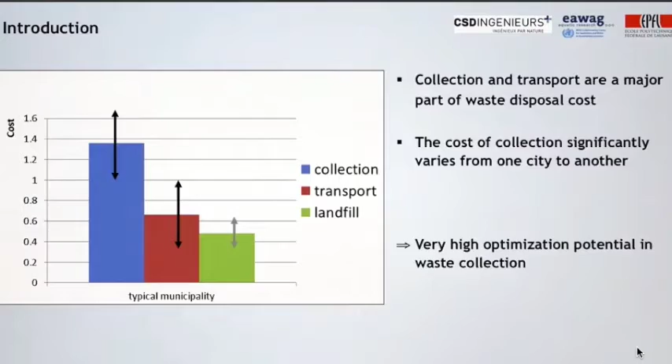Frequencies, collection routes, equipment, bags or containers, and trucks have a big influence on the cost. What is the main problem of waste management? Money. We don't have enough money to do waste management as well as we think we should.

Thus, we have two solutions: either we bring the cost down, or we adapt revenues and taxes to reach a sufficient level. Generally, we have to do both. Today, we will see how to bring the cost down and improve the service to the population.

What are the most expensive elements in waste collection? First, there are trucks. The trucks are very expensive, and also the workers. The workers are also a big part of the cost. Thus, if we want to reduce the cost, we have to develop solutions to use these important elements better.

We have to work on time reduction in order to load as much waste as possible in a reduced time. For that, we have to work on the organization and on the equipment.

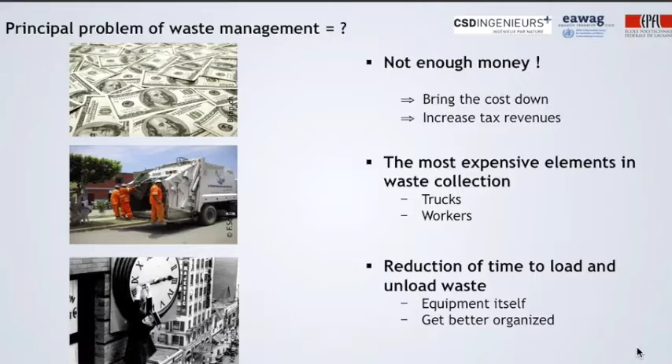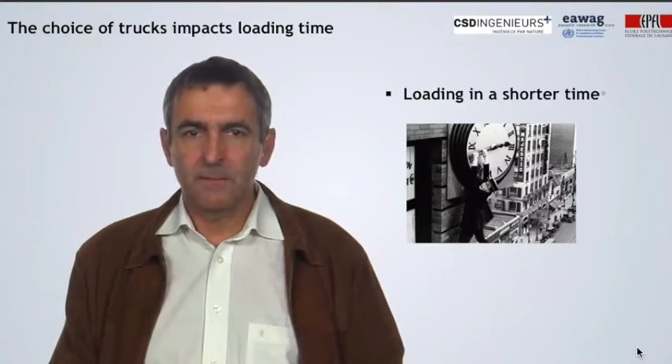We need to choose good trucks in order to minimize as much as possible the time needed to load, transport, and then unload the waste. For that, we have to choose trucks allowing us to load the waste in the shortest time possible. An important point is to have a compaction system which allows us to take more waste.

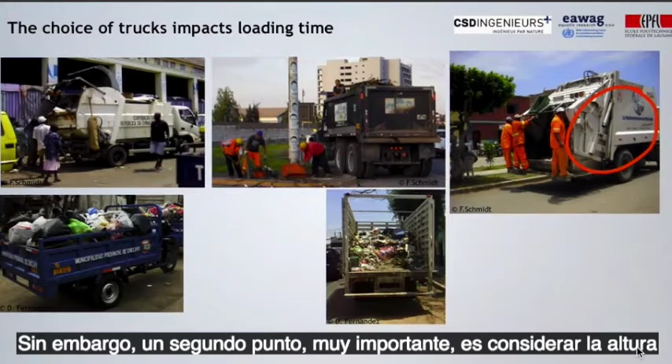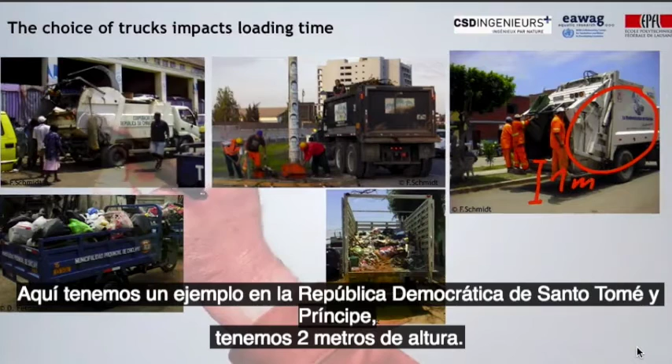But a second, very important point is to consider the height of loading the waste. Here we have some at 1 meter height. Here in this example in Sao Tome, we have 2 meters height. It's much more work, much more time.

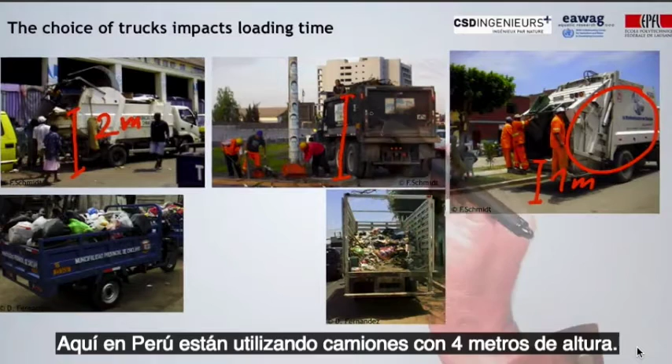Here in Peru, we are using trucks with 4 meters height. This needs much more work, much more time, and a lot of people for doing the same job.

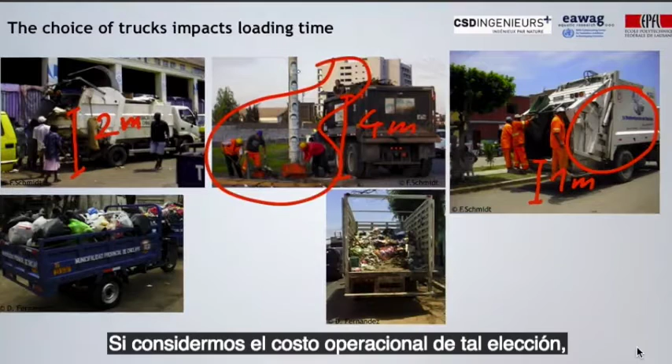If we consider the cost of operation of such choices, here in Peru we have an estimation of some 60 soles per ton. With this kind of truck, we are at about 350 soles per ton. This is 5 times more.

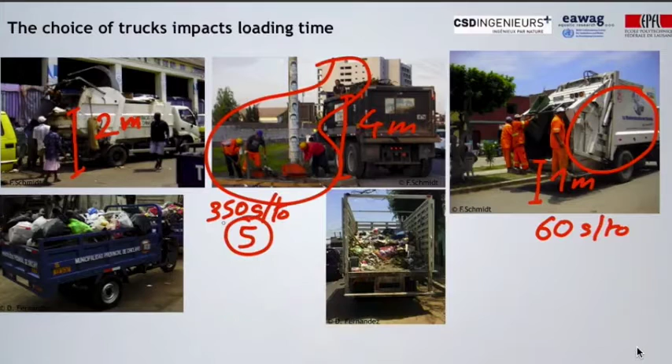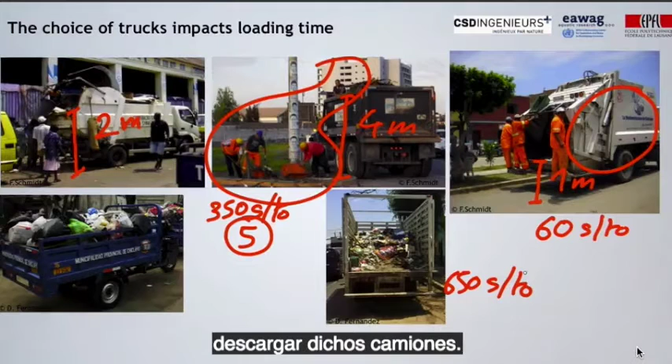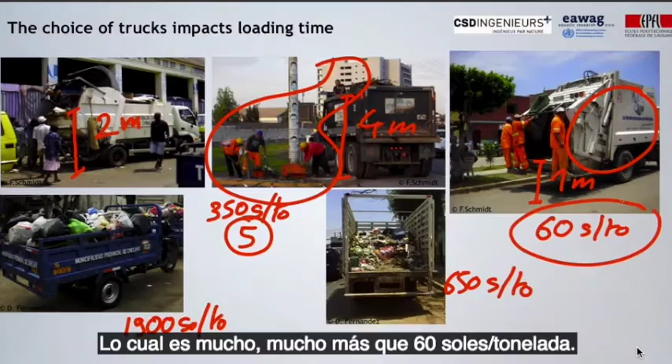And if we consider this kind of open truck, we are at about 650 soles per ton, because it needs a lot of time to load and unload such trucks. And if we consider these little vehicles here, which could be very useful to go in our streets, the cost is around 1900 soles per ton. It is much, much higher than our 60 soles per ton. So the choice of good trucks is very important in order to reduce the cost of collection and transport.

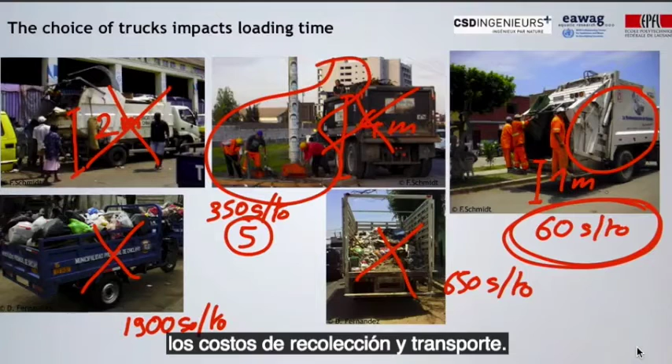The volume of the trucks is also a very important point of efficiency. If we consider such trucks, we have approximately 0.8 tons per cubic meter, because we have a compaction system. We have more or less 7 cubic meters, which makes more or less 5.6 tons.

In such open trucks, we have only 0.3 tons per cubic meter. Also about 8 cubic meters, we have only 2.4 tons. This is just half. In this bike system, we have also 0.3 tons per cubic meter and 1 cubic meter, which means only 0.3 or 0.5 tons.

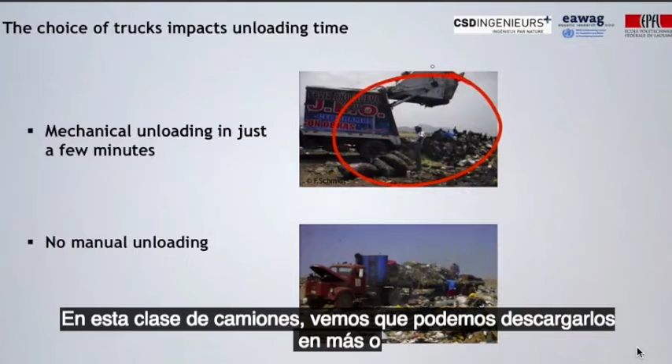So the transportation efficiency between these different types of trucks is very different, and we have to choose a good volume for efficient transportation. This has an influence on time and fuel consumption. Another element, very simple, is to choose trucks having an unloading time as short as possible. With this kind of truck, we can unload it in more or less 2 minutes with one driver.

If you have to do it manually, like in this situation, we need 3 or 4 hours with 3 or 4 workers. These are not good solutions.

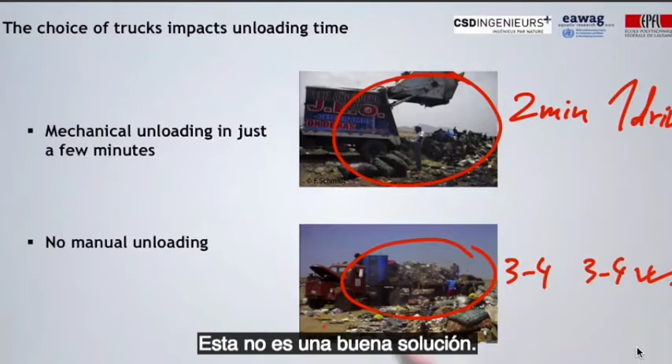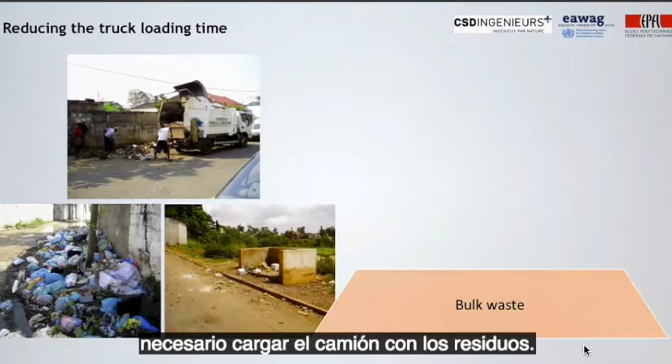For reducing the time the trucks are stopped for loading the waste, we also need to choose a good container strategy. Bulk waste on the ground is the worst case. Here, in Albania or in Sao Tome, we see how many times it's necessary to load the waste to the truck. The utilization of plastic bags allows a faster loading time.

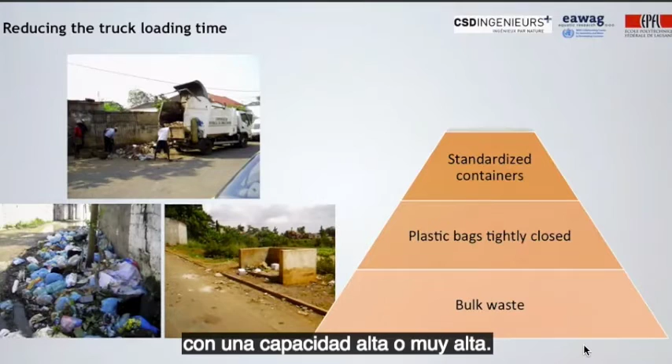The best is the utilization of containers and, if possible, standardized containers. The ideal solution for reducing the loading time is to provide containers with large or very large capacity. A truck takes more or less the same time to load 100 liters or 3 cubic meters.

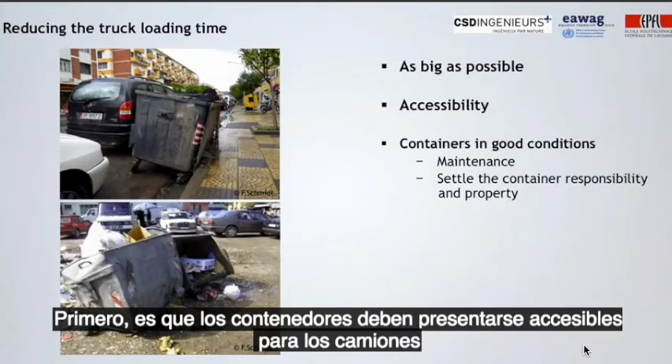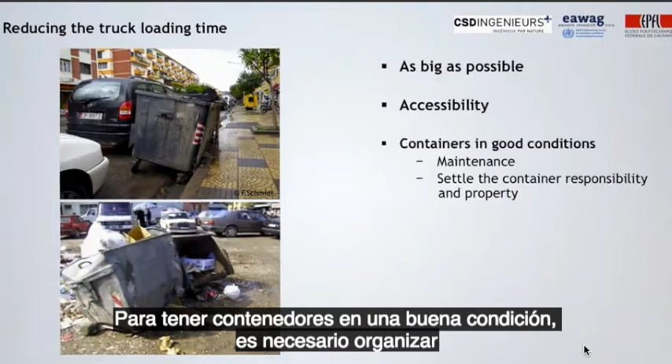There are some other conditions to reduce the loading time. First is that the containers must be accessible for the trucks and not blocked, like here in Albania, by the cars. For having the containers in good condition, it needs to organize maintenance and repair of the containers.

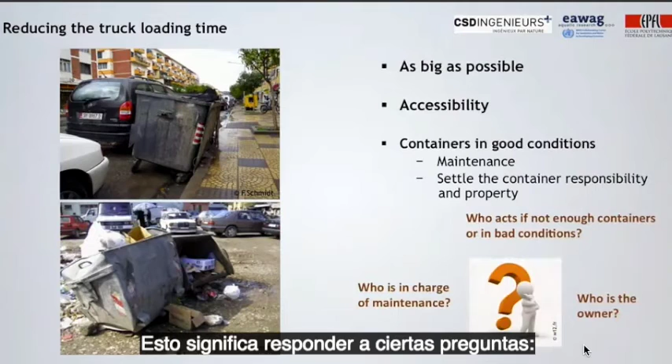This means to respond to some questions. Who is the owner of the container? Who is responsible? Who is in charge of the maintenance? Who will react if there are not enough containers or if the containers are not in good condition?

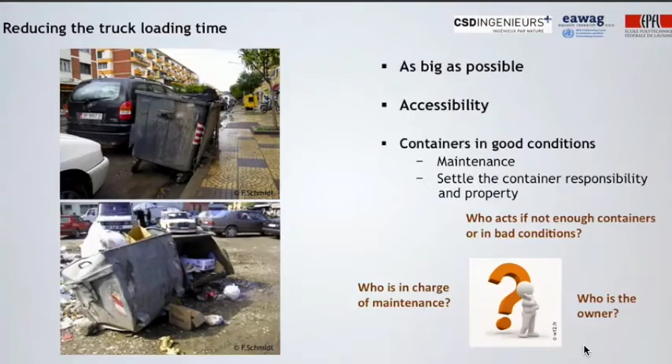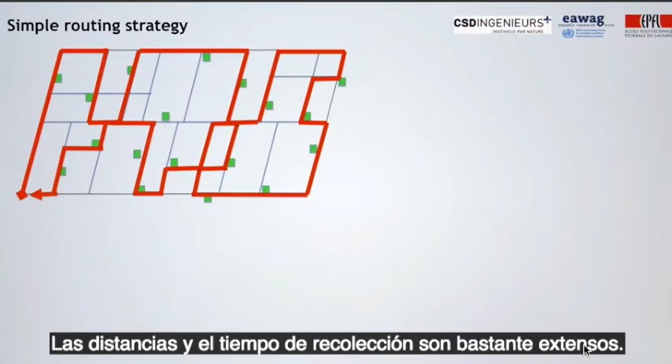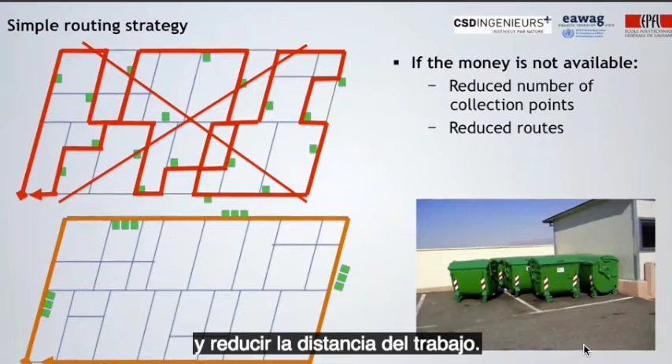A good routing design is another important point for an efficient collection of the waste. In this example, we see the door-to-door collection of every container. The collection time and distances are quite high. It could also be possible to reduce the number of loading points and to reduce the distance of the work. It will take less time, less effort for the same number of containers.

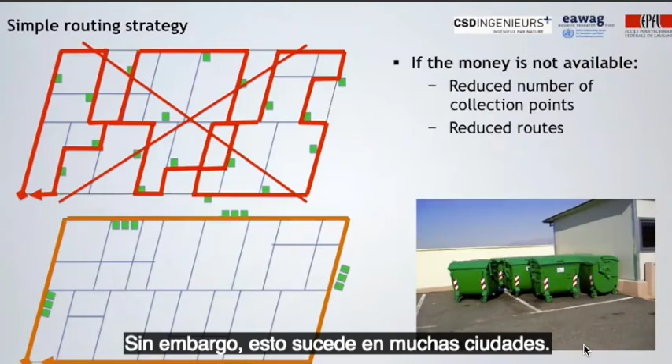It will require that the population has to go 100 or 200 meters to the container, but this happens in a lot of cities. Finally, transport is an important part of the cost, as we saw at the beginning. Transport costs depend on local conditions, quantities, distances and material. If you use a big truck or a small one, the time and fuel consumption are more or less the same. So it's very important to use trucks as big as possible.

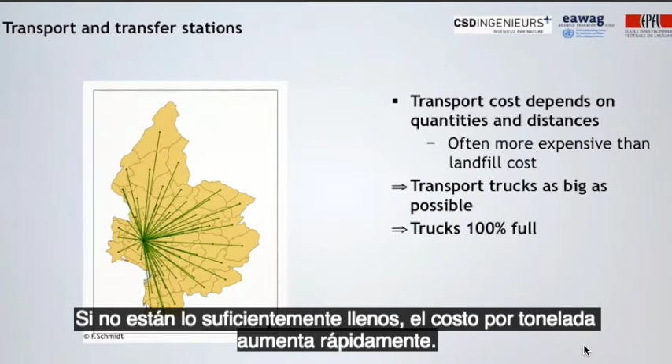To reduce the cost, it is also important that the trucks are on average near 100% full. If they are not full enough, the cost per ton will increase rapidly. But in general, collection trucks are not optimal for transport. If the distance to the landfill is more than some 20 kilometers, and if the volume is big enough, it is interesting to study the possibility of implementing a transfer station.

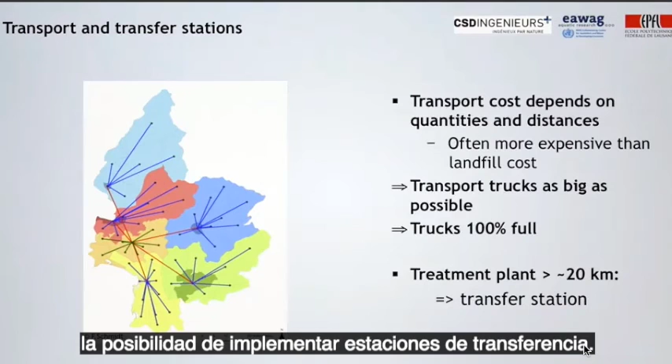In this case, transport is done by big trucks having the capacity of 3 to 5 collection trucks. Collection trucks and teams keep working in the city, and transport trucks ensure the transport to the landfill. Such transportation can contribute significantly to the efficiency and to the cost reduction of the transport.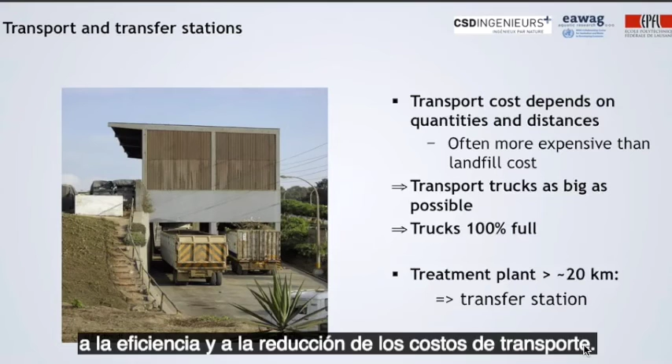The sustainability of the waste management service strongly depends on the cost. Experience shows that there is usually a big potential for cost reduction in collection and transport. Working for cost reduction means choosing good trucks and good bins in order to reduce the time, but also choosing a reduced number of collection points, making good routing, and creating a good organization and maintenance system of trucks and bins.

Next time, we will see in more detail how to proceed with an analysis of the present situation in order to reduce this cost.